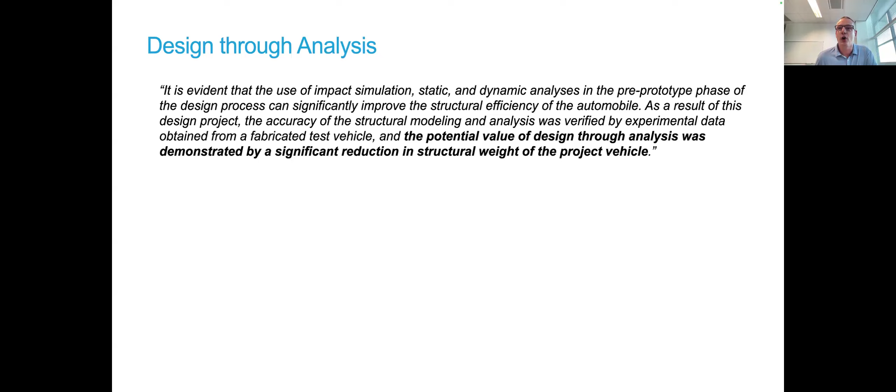To illustrate that, I've put a quote from a paper, just the highlighted part. The potential value of design through analysis was demonstrated by a significant reduction in structure weight of the project vehicle. This is from the automotive industry, and what's surprising is that this paper dates back to 1977. At that time, there weren't big computers that could do simulations in 3D as we do today.

The point they make is that they are not introducing these concepts as new methods. All these methods, in a very rudimentary form, had been around at that time, but they say the manner in which these techniques were integrated and applied in a design environment—that's the primary topic of that 1977 paper.

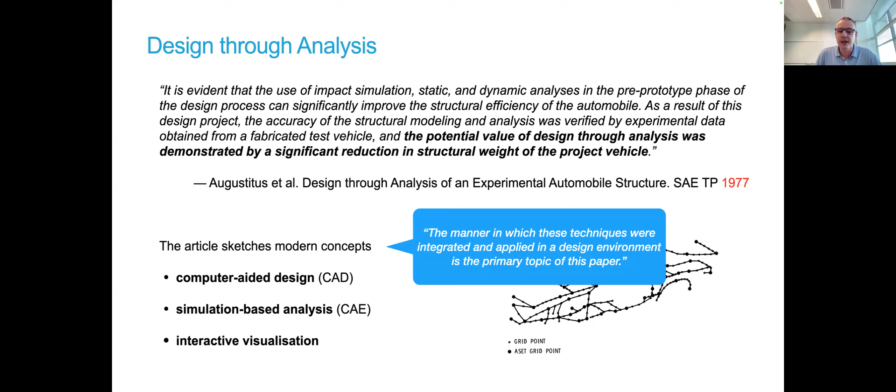Now, many years later, where the compute power is there to do really large simulations in 2D and 3D with very good resolution, I want to pick up this design through analysis concept and explain our vision: a framework that allows both rapid prototyping—for the design exploration or prototyping phase—and more.

And then for the thorough analysis, that means really number crunching to get very accurate results. And the important thing here is the word unified. So I don't want a finite element analysis for the second and something completely different for the prototyping. I want something that seamlessly blends from one to the other, seamlessly in a mathematical sense.

I want something that has the same mathematical background or framework. The ingredients we use, and we'll go through most of them in this talk, are volumetric CAD. I'll say a few words about what I mean by volumetric CAD. Then parametrization techniques, reparametrization techniques, isogeometric analysis, IGA—that's our workhorse for the accurate simulation. And physics-informed machine learning, that's what we use for the rapid prototyping.

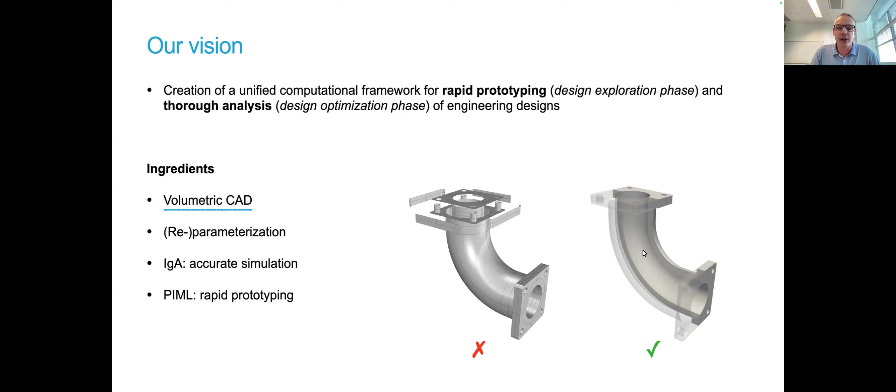Volumetric CAD, what do I mean by that? Normally CAD is just a surface description of your geometry. So you see it here—this tube would be composed of many surface patches, but you don't have anything inside. But for the real analysis, you also need a mesh, if you so want, if you're coming from finite elements, or let's say control points in the interior. So we are really looking at trivariate parametrizations.

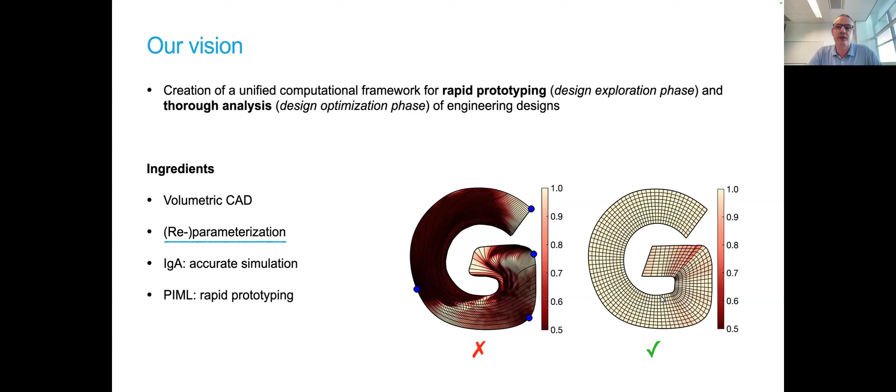And the same, looking again from the outside, the same geometry, but with a much better interior parametrization. That is what I mean by reparametrization techniques, that automatically convert something that you would design in your CAD, giving you automatically these nice, analysis-suitable parametrizations.

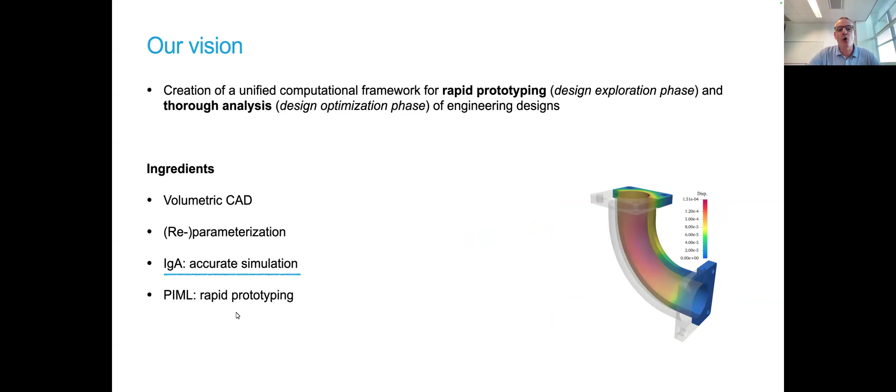On that, we do for the accurate simulation IGA. You can also see it as B-spline-based finite element analysis. These are the things we use from IGA, not more than that. And for the physics-informed machine learning, I hope I can show you how we smoothly blend classical IGA to a deep operator learning framework.

So the outline is logically as follows: a few words about the mathematical core, B-splines and IGA, and then how we develop from classical IGA these IGA nets—this is the physics-informed machine learning approach that I'm going to present here. And if time allows, I will also speak about some implementation details, because it's all about speed, and if you do some tricks here, you can really speed it up. And then finally I want to give you some outlook on a new software tool we are currently developing that allows design through analysis with multiple people at the same time.

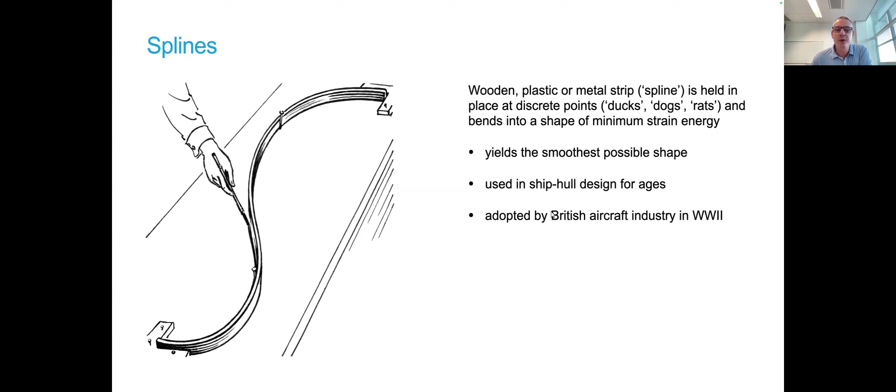So let's start with splines. Before we look into the math of it, I just want to show you that they really exist, or existed, in the real world. You had some strips—wooden or plastic or metal strips—and if you fix them at some places, here, for example, here and there, and then here and here, they attain a shape. They attain the shape of minimum strain energy, and it's a smooth curve that you get. And then if you draw this curve, you can use it—it has been used in ship hull design and then was later adopted in the aircraft industry. This idea, that you have something which you fix at discrete points, a few discrete points, and then you get a very smooth shape, that's also what we do in the mathematical counterpart of this.

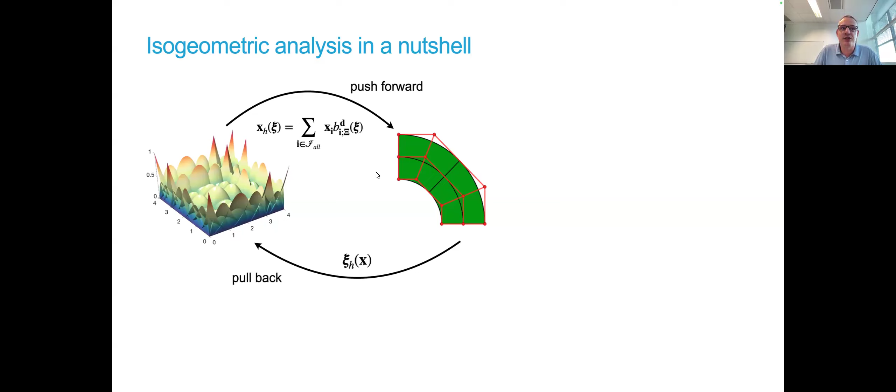But let's skip this detail for the moment. Let's just focus on a single patch, something which is, say, bijective to a unit square, or to a square.

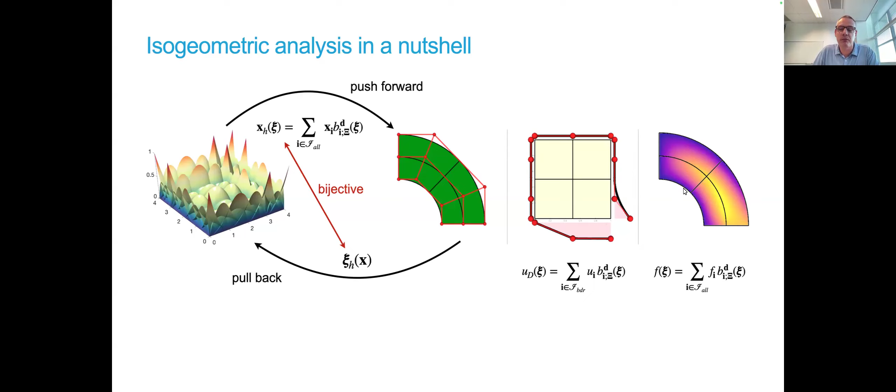It's not only the geometry that is represented in terms of this basis, but everything else. For example, the boundary conditions. Here we have Dirichlet boundary conditions that can be represented in terms of the basis, restricted to the boundary, and the control points or solution values at the boundary. Likewise, we can also represent load vectors or the right-hand side in exactly this way.

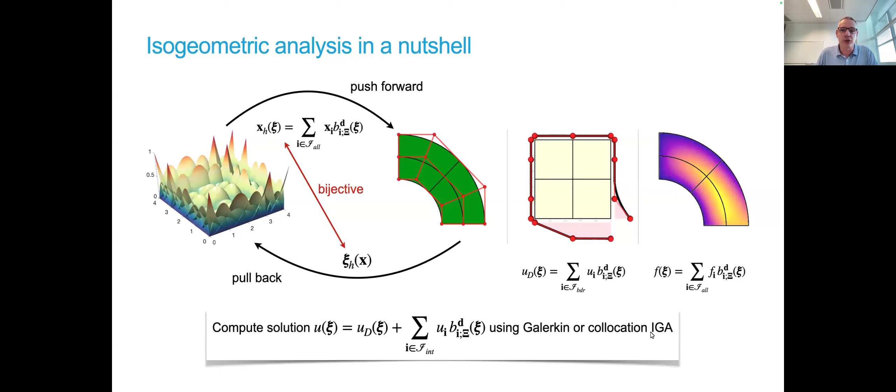With these three ingredients, we can compute the solution with fixed Dirichlet values. What we actually compute are just the solution values in the interior, either with Galerkin isogeometric analysis, which is what most people do in the IGA community, or with collocation IGA, which is what we do here, because that blends very elegantly with machine learning. So allow me to skip Galerkin IGA and immediately move on to collocation IGA.

How is it derived? If we look at the model problem, very simple, just linear: we have a linear differential operator acting on U in the interior, and another differential operator on the boundary. It can be the identity if we have Dirichlet values, or the normal derivative if we have Neumann values. We derive a special weighted residual form, weighting these residuals with some test functions, integrating over the entire domain and the boundary, and requiring that this weighted residual is zero.

So what about these phi's? Well, we compose them from Dirac delta functions centered around some discrete points. A couple of discrete points come from the interior, and another couple come from the boundary. The important thing is that the sum of all these points equals n, and n is the number of basis functions. That means we need as many sampling points as we have basis functions.

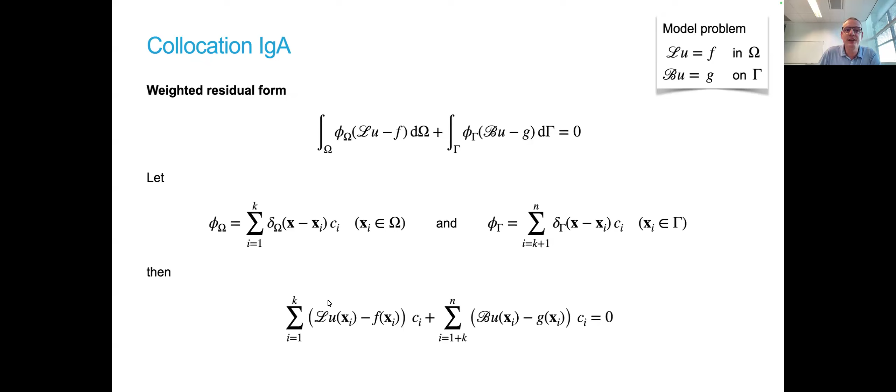With this expansion, or this ansatz, if we substitute phi omega and phi gamma here, we get this requirement, which is really equivalent to that. If we look at what these coefficients Ci are, well, they are arbitrary. So basically we don't need this here, but we can replace it by a linear system of equations.

We drop the CIs, and for each CI that we had, we get an equation. So we get k equations for the interior residual, and n minus k, the remaining number of equations, for the boundary residual.

If we then substitute u by its basis expansion, where b are again the basis functions and u, j are the coefficients we are after, and substitute them here, we get a linear system of equations that, if we solve it, gives us the unknowns u1 up to un. I should say this system is, of course, not dense—it is very sparse, like in finite elements—but just to give you an idea of what is in the system, I kept it dense for the moment.

A few remarks here. First, since we are not doing what we would typically do in Galerkin, i.e. integration by parts—shifting some derivatives from the trial to the test function—we're not doing that here. That means we have a higher requirement on continuity. In particular, if this L is, for example, the Laplacian, so if we have second derivatives, then we also need C2 continuous basis functions. That's where the higher continuity of B-splines is very helpful.

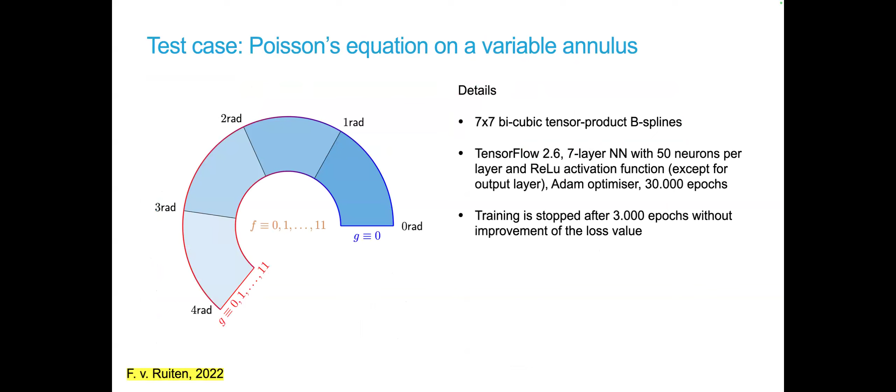Professor Möller, I had a question on that previous slide, if you don't mind. Sure, go ahead.

So when you say you're using geometry as an input with n number of points, what is the dimensionality of that input for the network? Is it the total number of points as a dimension? If you have, say, a 20 by 20 control points grid in 2D, you'd have exactly this for the geometry in X and Y, so times 2, and the same number for this. So you have a couple hundred inputs. Our networks are relatively not deep, but relatively wide.

Perfect, may I go to the next slide then? Sure. So here, what we have is bicubic 2D, 7 by 7 — meaning we have 7 times 7 X values, 7 times 7 Y values. The load vector we encode differently. So if we just encode the geometry, we have 7 times 7 times 2 inputs, which is basically close to 98 or 100 dimensional input.

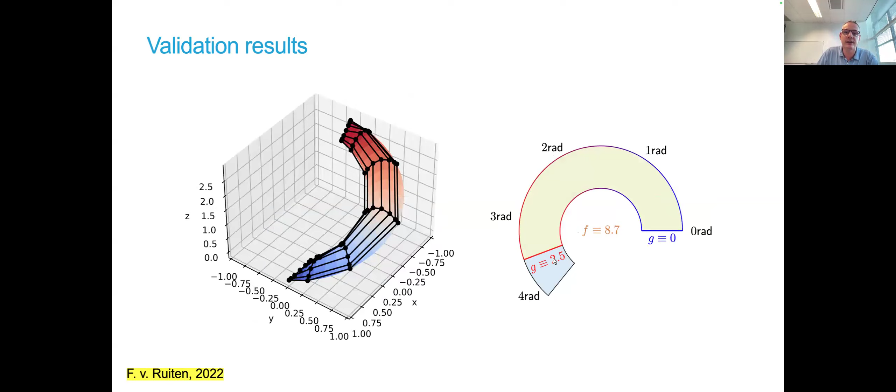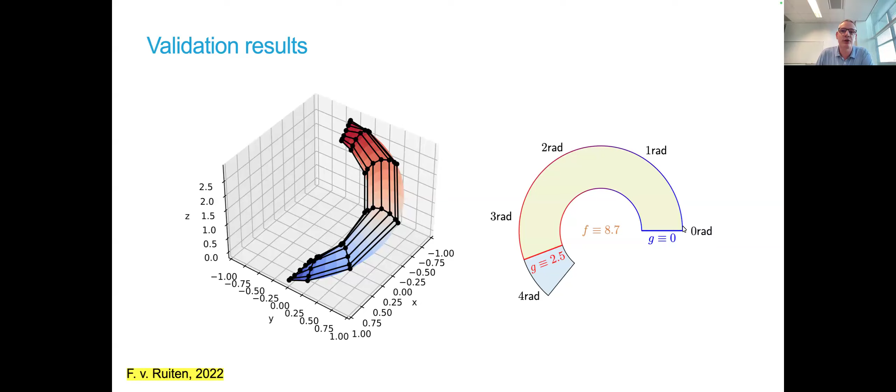We have now an unseen right-hand side, an unseen geometry, and an unseen boundary value, and it all qualitatively works. So in some sense it validates that this approach of IGA-nets does work. This is all for Poisson, I should say. What we then tried is hyperparameter tuning, which addresses a bit what you asked.

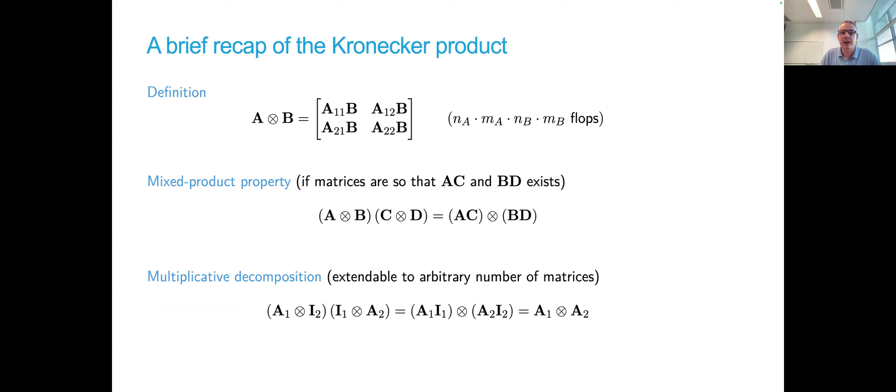So actually, this here is what we would like to compute. Let me go back - these are the things that we would like to compute, and we can replace this by several matrix products. So these are the three, or the Kronecker product between three matrices that we want to compute. We can split it up with this decomposition from the previous slides like this.

And when we have that, we can apply a very nice algorithm that has been introduced by Fackler in 2019, where it kind of goes in rounds. It peels off one dimension and then goes over this round, and then over this round, and then over this round. So I'll just give you the pseudocode here.

What it does is take the relevant coefficients from this big tensor, do a reshape on that - but this reshape involves no movement in memory, it's just looking at the same piece of memory with different meta information - and then peel off the first dimension multiplied by the first univariate B-spline, then the second and the third. So this is a very efficient and especially memory efficient way to calculate the multivariate B-splines.

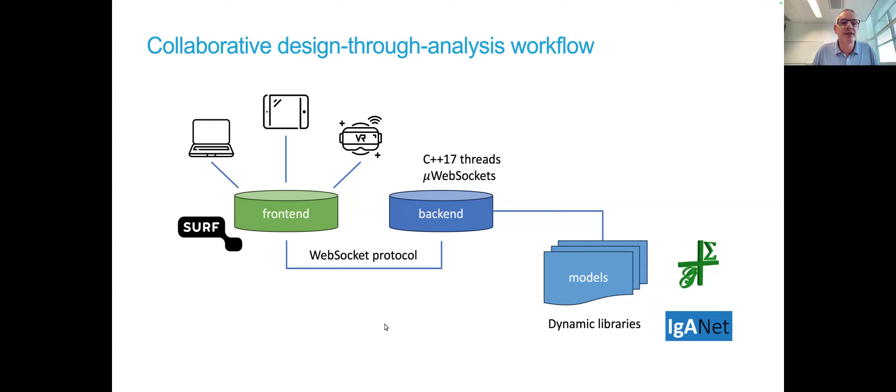Let me show you one little live demo, then you get an idea of what I mean by this. Let me stop sharing for a second, move to this, and share again. Yeah, so this is the... you see this screen? Ness? Yes, we see. Yes, okay, so this is the system. It's a prototype, I should say, that we are working on.

Let's assume we do a simple 2D Poisson problem. We are adding it here - it's already configured with zero Dirichlet conditions, a load of 1 here. Let me refine it because there are too few degrees of freedom, and maybe I want to change the north side of the domain - I want to change the boundary conditions, let's say, to this, for example.

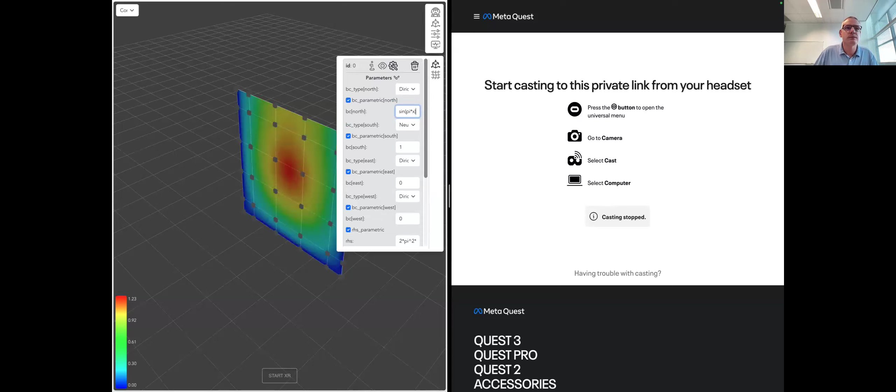So that has changed. What I now try to do is connect with the second session to this, and then you see what I mean.

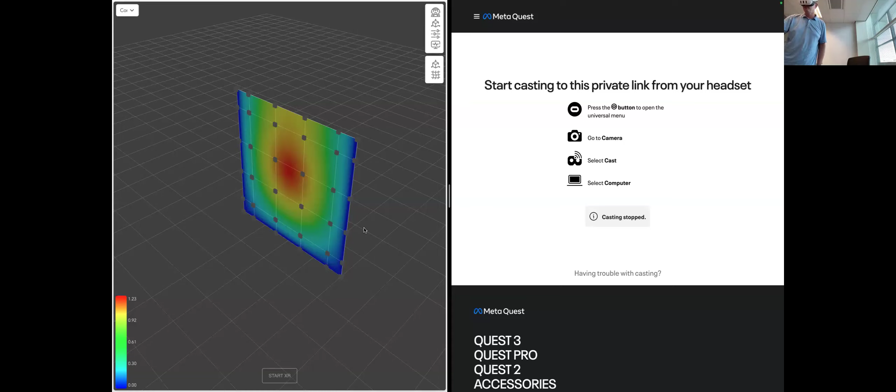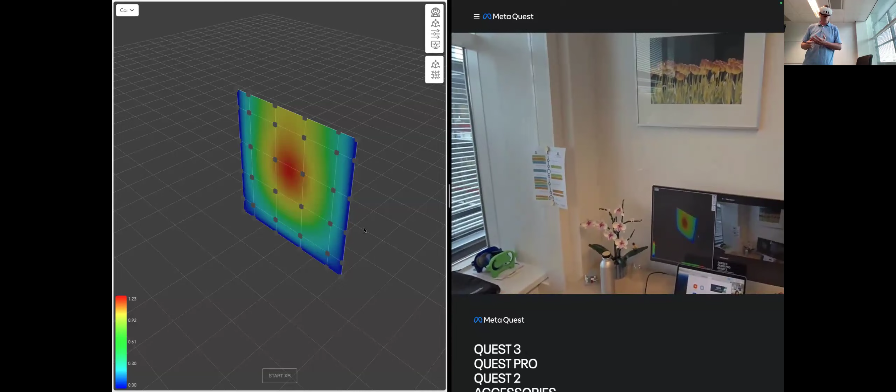Do you also see this moving picture? Yes. The second session is, as said in the abstract, a VR device. All these things like setting up the boundary conditions, that's of course something one can easily do on a flat screen. But maybe if someone is more interested in the geometric modeling, then this person wants to connect via a VR device.

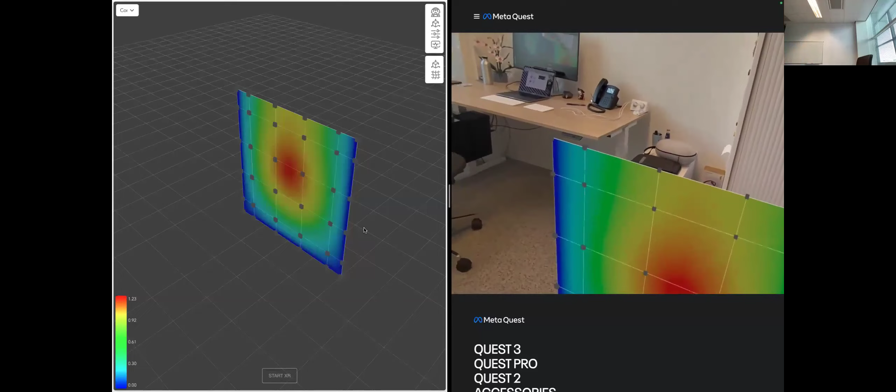Okay, sorry for the technical issue. So now you see, hopefully, what I see from the VR device on the right part of the screen, and what the other person with the flat screen would see.

Now what I can do is I can change the geometry. You see it's changing everywhere. That's maybe something that makes more sense in the VR device than on a flat screen.

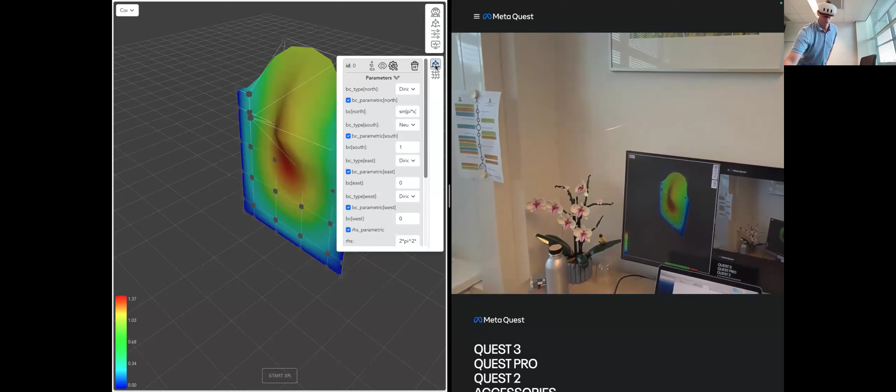And also, if you would now add a... yeah, that was just a flat thing. If you would add a volumetric thing, just a volumetric object, let's also refine it.

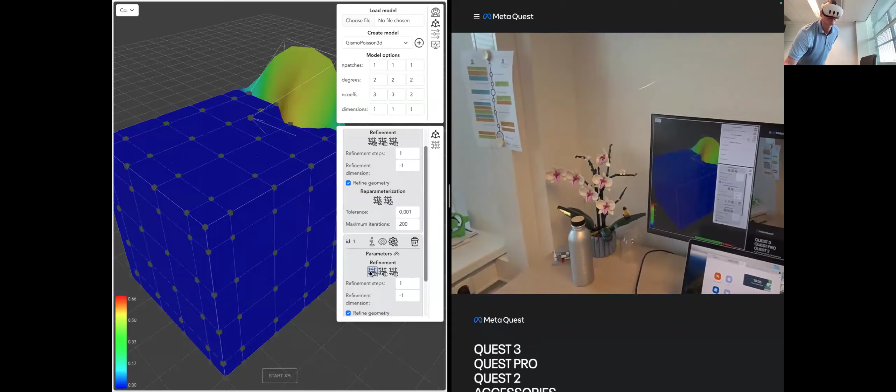So you see it also appeared in my virtual environment, or in my virtual scene. And now if you start moving this and wonder how it looks inside, then you look inside and here you see this grid. So all these points, this, for example, is one of these control points in the interior that I spoke about.

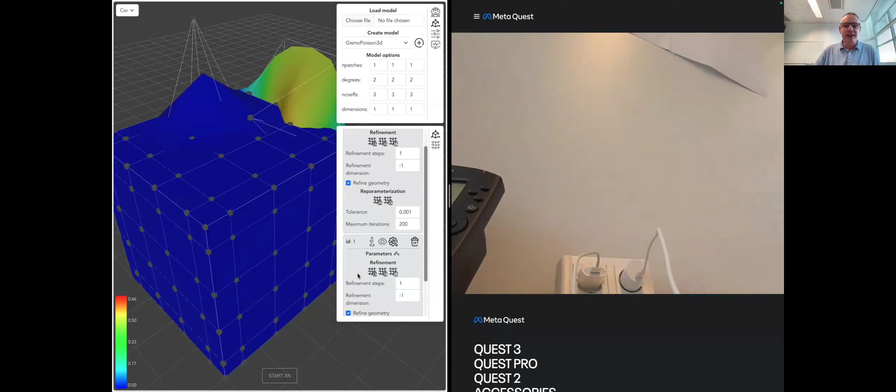So I think I'm getting over time. So let me stop sharing and come to the conclusion.

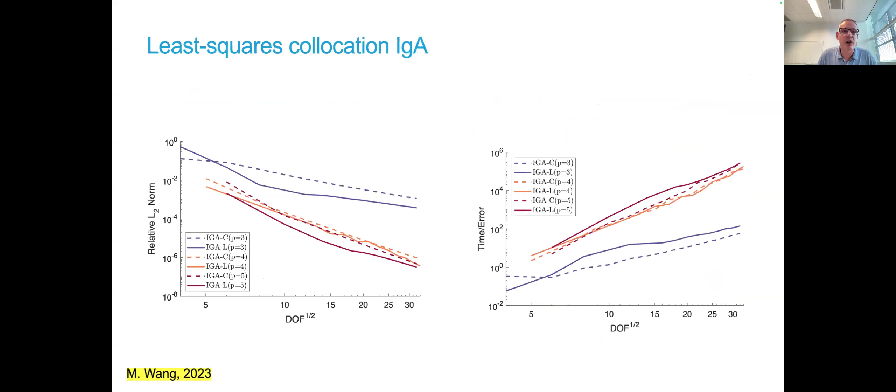Can I reuse this model, or do you have to train it from scratch? No, it's really good that you asked that. Let's say this network, when I say 'all,' please see it in quotes, for all the geometries that I showed to it during training, and similar ones, it can be used. So what we do, for example, we showed it 4 different geometries, and within these geometries it can kind of work.

If we show it a geometry that has the boundary here, that does work. That's very much like in PINNs. It is good at interpolating, not so much at extrapolating. So if we only showed it these 4 geometries, don't expect that it can work for a completely different one, like a snake geometry. That of course doesn't work.

So the idea is we train it for the typical set of geometries that are of interest for this particular application, and that very much depends. It could be, for example, wings. If we talk about aircraft wings, they have a very similar shape. And if we train it for a lot of different geometries of this wing type shape, it should be good at predicting also for an unseen wing type.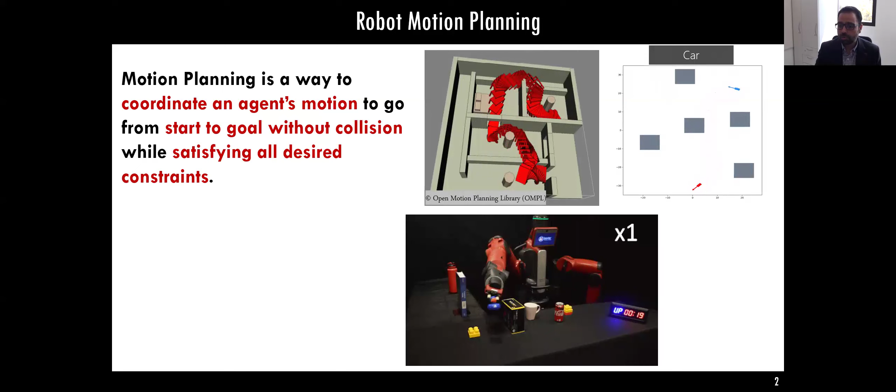Similarly, in autonomous driving, making cars move while respecting curvature constraints requires solving the motion planning problem. This also applies in robot manipulation, and beyond robotics, in computational biology for finding protein folding paths, and in computer graphics for generating the motion of animated characters.

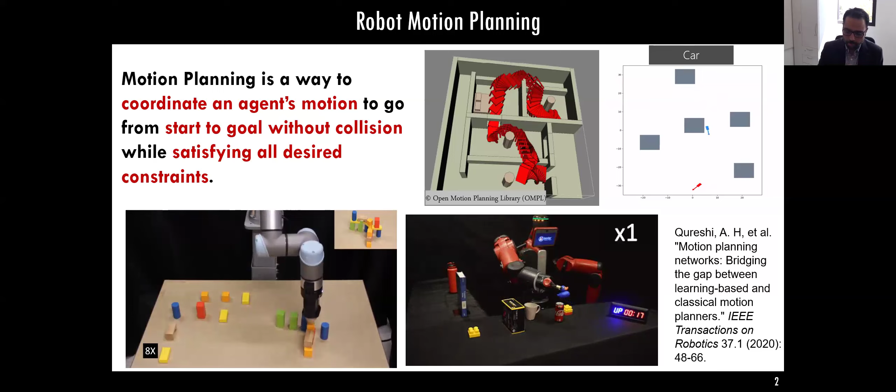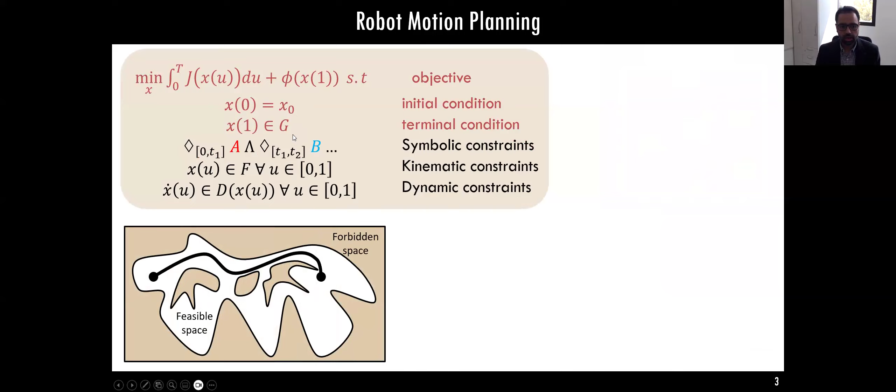Mathematically, this problem looks like this. The motion planning problem translates into a trajectory finding problem, where you are given some start and goal, so there are boundary conditions on the initial state and the goal state. This trajectory needs to satisfy some objective function J, which could be path length, and which could include a collision avoidance constraint. We also add some weighting so that it terminates once the trajectory reaches the goal state. This equation, highlighted in red, is called the geometric motion planning problem.

It appears whenever a robot moves and only has to adhere to, for example, a collision avoidance constraint. As you can see in this robot, it is coming out of this tight scenario confined by tables, and it needs to come over the top, grab this blue object, and move it to the yellow target marked as a Lego block.

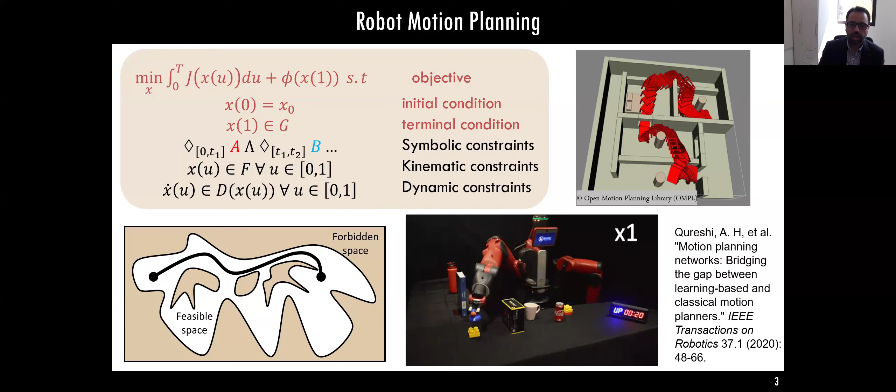Now, on this trajectory, we can add additional constraints. For example, we can add symbolic constraints saying that before you reach your final destination, achieve some sub-goals, like sub-goal A and sub-goal B, before reaching your destination.

How does this translate to the real world? For example, you have this confined environment and your robot needs to retrieve some object. In this case, the robot needs to retrieve this yellow object, which is a banana, and then it needs to move—but as you can see, it cannot reach there. It needs to move this red object and the blue object out of the way so that it can clear its path to reach the target without collision.

An application of these tasks is, for example, a home robot that you want to fetch something from your kitchen cabinet or refrigerator. It will have to rearrange objects and solve these kinds of problems to retrieve and fetch objects for you.

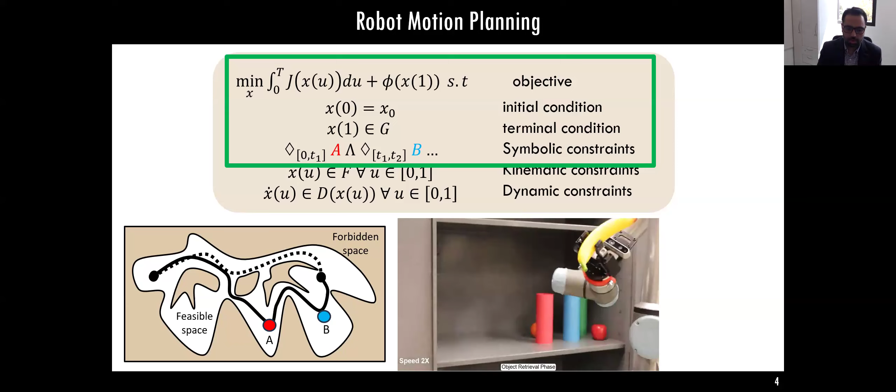On top of these constraints, we can also add kinematic constraints. They are a function of robot joint configuration, and basically they limit the joint space. They usually appear when your robot is physically interacting with the environment. For example, imagine a robot opening a door—the robot hand is attached to the door, and the door hinge is controlling the robot's motion.

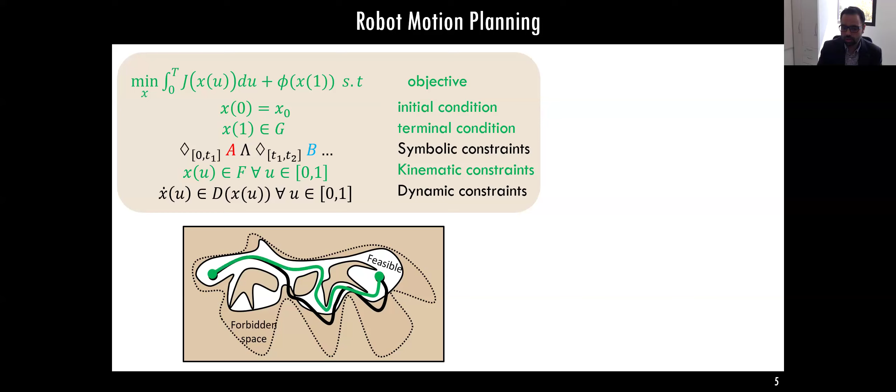These constraints induce a thin manifold inside the robot's configuration space where the algorithm needs to find a solution. For example, in the application I mentioned, the robot is attached to the door and needs to respect its physics in order to generate the door-opening motion. In another example, this robot will pick up a glass and move it from one point to another, with the constraint that it cannot tilt it along certain axes to prevent liquid inside it from spilling.

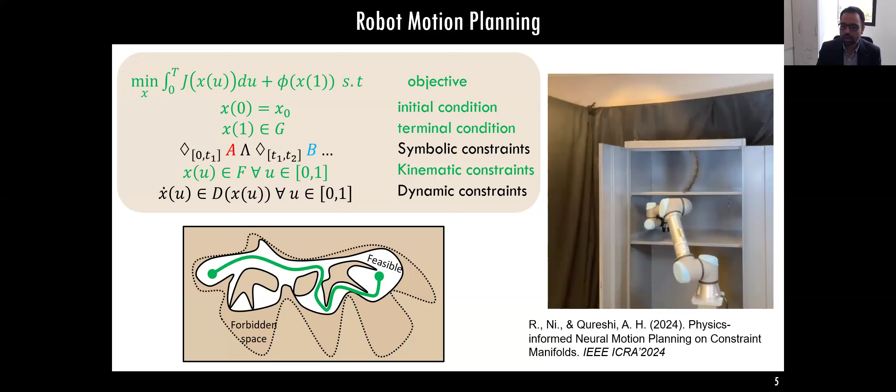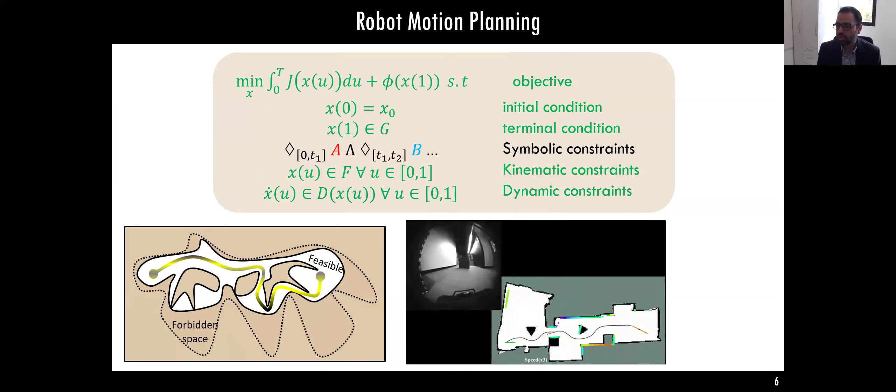And then there are additional dynamical constraints. They are a function of time, and they basically control the robot speed and the impact force that it applies in the environment that it is interacting with. For example, in autonomous driving, it could be high speed navigation or low speed navigation, depending on the scenario. So the robot needs to plan how fast it can interact with the environment, and that indirectly controls the force it applies on the environment.

So today's talk will focus first on geometric planning, and then we will also discuss a little bit about kinematic constraints. That will be the focus of today's presentation.

When we add these constraints, they introduce some forbidden space inside the robot configuration space and some feasible space. The objective of these algorithms is to find the solution in this feasible space.

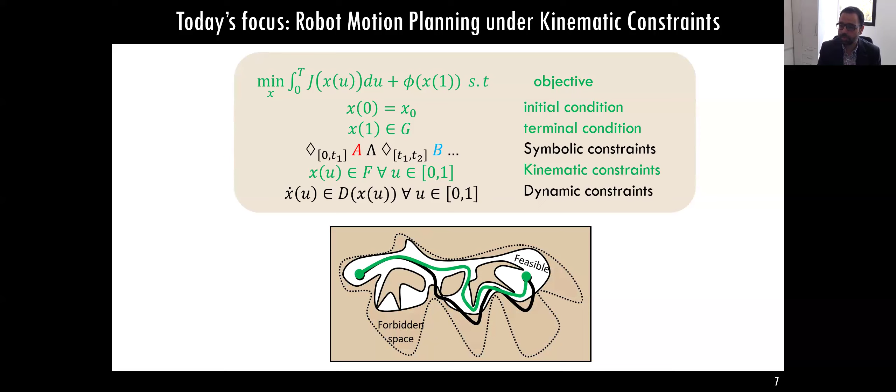Okay, so let's get started. This problem of geometric motion planning was introduced in 1983 by three sets of papers where they asked a simple problem of how to move a piano from one point to another without collision. That was a very simple problem. It is solved now, but since then many algorithms have been proposed to solve this problem. As I said, it has application beyond this piano mover problem, in controlling robot motion, in computational biology, as well as in computer graphics.

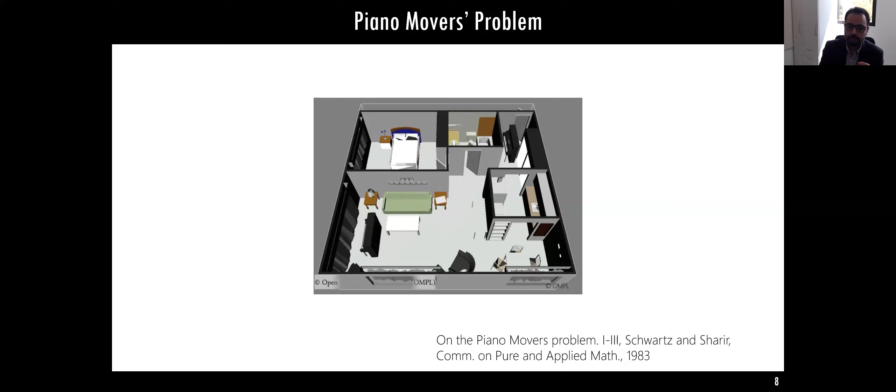So since then, many algorithms have been proposed, and this is a brief taxonomy of those approaches. There are control-based approaches that build on control theoretic methods, such as model predictive controllers, but they plan robot motion locally. They usually do not find a global solution.

Then there are heuristic-based methods that discretize the space, for example A star and D star. However, they suffer from the curse of dimensionality due to discretization. As your robot configuration space increases, the discretization becomes intractable to handle.

Then there are optimization-based approaches that introduce nice numerical optimization algorithms to solve the motion planning problem. They suffer from local minima, and often they are unable to provide a global solution to the trajectories.

Arguably, the most used algorithms are sampling-based planners. I will discuss them briefly. They find global solutions and provide some theoretical completeness guarantees, meaning that if there exists a path solution, this algorithm will eventually find that path solution. So let's discuss briefly the sampling-based planner.

They construct a graph. They randomly sample the feasible space, which is collision-free space, and they find the nearest neighbor and connect this node to the tree. They keep repeating this process until eventually a sample will fall in the goal and it will be connectable to the tree. Then one branch of the tree is the path solution.

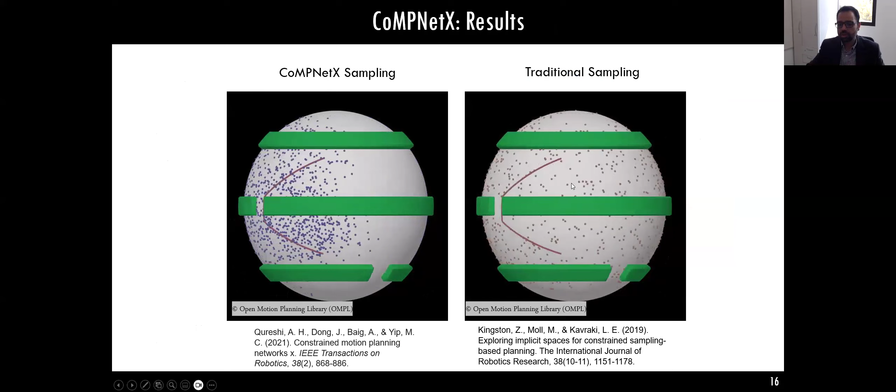And if you replace the data of this planner with, let's say, some constrained planner that adheres to kinematic constraints, then it can also solve constrained problems such as generating samples on the constraint manifold. Here you can see on this sphere manifold, once you train the neural network, which we call CoMPNetX, it samples in the region that potentially contains the path solution, whereas traditional sampling has to sample the entire space before it can retrieve a path solution.

So here's a demonstration: this robot needs to throw all these bottles and cans into the trash bin. Here we just have the collision avoidance constraint. Then it needs to reach this cabinet door and open it, from any random starting configuration to the final fully open goal configuration.

Then it needs to fetch this black and red mug and move it to the tray without tilting, so there is an orientation kinematic constraint on it. Finally, this robot needs to move this pitcher into the cabinet again without tilting.

So the advantage of this imitation learning based method - if you look at their planning times - is that CoMPNetX-RRTConnect has much lower planning times than classical methods, because classical methods have to sample the entire space.

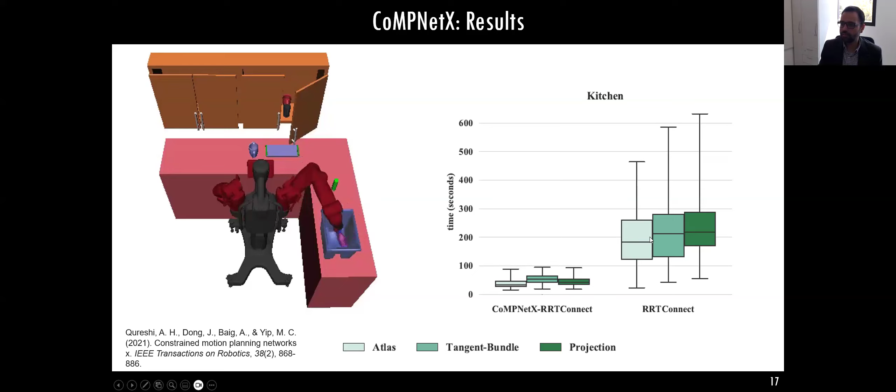And we also demonstrated this on a real toy bartender setting, where the robot will throw these cans and empty bottles into the trash bin. Once that's done, it will move this pitcher and cup to the tray without tilting.

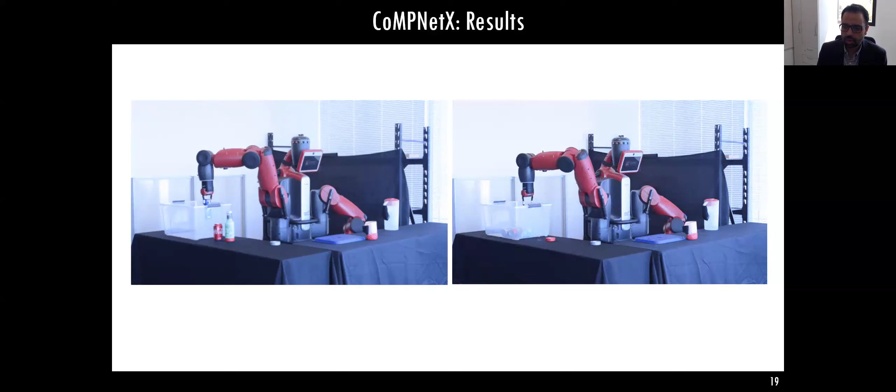Okay, so now we have sampling-based planners, which can take minutes, and we have learning-based planners, which use data from those classical planners and can find a path in seconds. So although they improve computation time, if you think about their data generation time, it can take a few hours or up to days depending on the problem.

So are they really bringing an advantage? Some people say we're all dealing with large scale data now, so why not just gather data for this learning-based planner? But I think the ideal planner would be something that finds paths in minutes, finds paths even faster than seconds, and has a data generation time of just a few minutes. So can we have those planners?

The answer is yes. If you design these methods to be physics-informed, they can relieve you from gathering this expensive dataset, and they can directly learn to solve that PDE equation. Once they are trained, we show that they find paths even faster than those learning-based planners. So the remainder of this talk will focus on these PDE-based robot motion planning algorithms.

So we introduce a new taxonomy here called physics-informed neural motion planner, and I will discuss the algorithms that we proposed. I can take a few questions here if there is any.

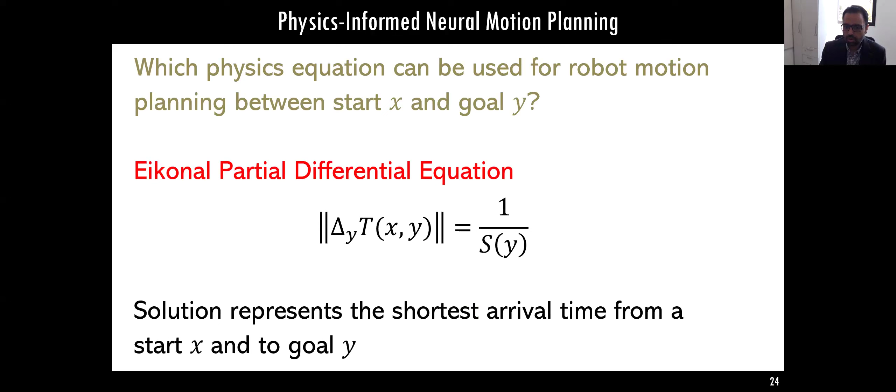Let's go into this physics-informed neural motion planner. The question is, which physics equation can be used for robot motion planning between a given start and goal? The answer is we use the eikonal PDE, which relates arrival time between a given start and goal to some speed model.

The classical algorithm that solves this equation is the fast marching method. It discretizes the space and does numerical optimization to find the solution to this eikonal PDE. The solution is this arrival time field. If the robot follows this arrival time field, it can navigate from one point to another.

The speed field basically describes what is feasible space and non-feasible space. The speed in free space will be maximum, however speed in obstacle spaces will be 0. When you solve this equation, the arrival time generates these wave fronts that can guide the robot from one point to another.

However, this fast marching method cannot be scaled to higher dimensions. Usually robots are 6 dimensional if you think of a robot arm, but for a humanoid robot, dimensions vary from 18 to 72 degrees of freedom. So these FMM-based methods cannot be scaled there.

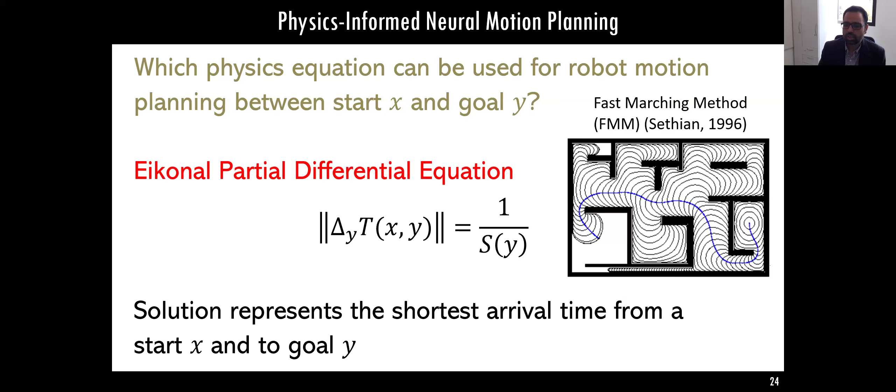So we need something that does not require discretization and that can be scaled to higher dimensions. We observed a few properties of this eikonal equation.

One, when we solve the motion planning problem, we noticed it should have this symmetric property. This implies that the arrival time from start to goal, and arrival time from goal to start under a simple collision avoidance constraint, should be equal. So there is this symmetric property.

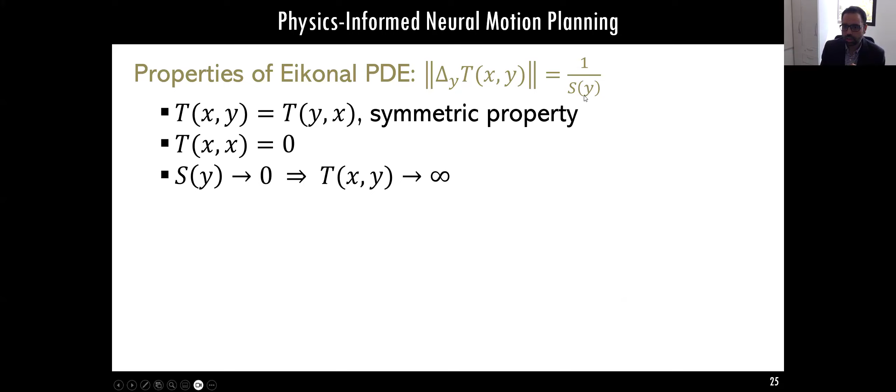Second, when the start and goal are the same point, the arrival time should be 0. Third, when one of the points is an obstacle, let's say y is an obstacle, then the speed will be 0, and the arrival time should be infinite, because of this relation: if the speed term is 0, then arrival time will be a very large number.

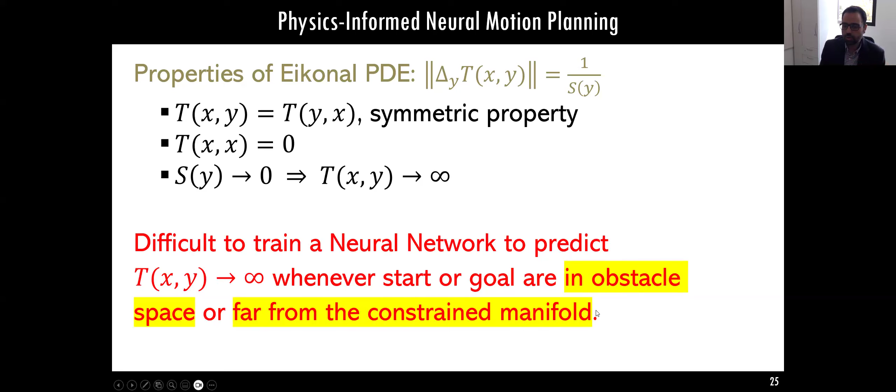If you notice these properties, they are very difficult for a neural network to learn. A neural network cannot correctly solve for cases where arrival time is close to infinity, or whenever the start and goal is an obstacle or far from the desired constraint manifold.

So we introduced a reformulation of this eikonal PDE that satisfies these properties, and we also introduced a progressive learning strategy to help guide the neural network to solve this problem. Let's begin with the reformulation of this eikonal PDE.

We factorized the eikonal equation. We define the arrival time as the ratio of the Euclidean distance between x and y divided by some tau, and the neural network will predict this tau. We can say that whenever start and goal are the same, tau can be 1, and this arrival time will be 0, because the distance will be 0.

But when one of these is an obstacle, we can make this tau be predicted as 0, and then this relation will hold the third property.

For the symmetric property, we adapted a neural architecture that you can check in our paper, 'NTFields: Neural Time Fields for Physics-Informed Robot Motion Planning.' Let's assume this neural network is a black box, a simple neural network, but there is some articulated structure, a symmetric operator in the architecture design that you can check in the paper. For simplicity, let's assume this is just some neural network.

It takes your start and goal, and predicts tau. Then we can use this tau to parameterize this factorized eikonal equation to get the arrival time. Once we have the arrival time, we can plug it into the eikonal equation and solve it.

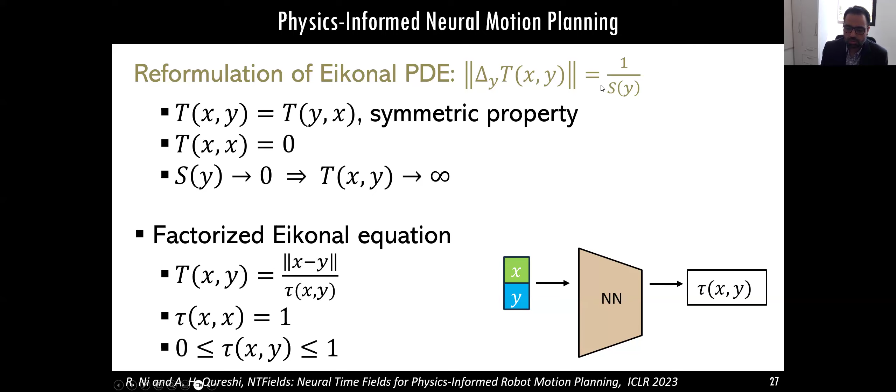So now this new formulation is easier to train because tau is between 0 and 1, which is easier for the neural network to predict.

Second, we noticed that this eikonal PDE also lacks a unique solution around obstacles. Whenever there's an obstacle, the features of this wavefront become very sharp, and there are multiple solutions. If you see this animation, there are sharp features near the obstacle, which leads to multiple solutions. We noticed that the neural network cannot correctly solve this equation because the equation is ill-posed.

So we added another term: a viscosity term based on the Laplacian, which made this equation a semi-linear elliptic PDE. Now we have this original term, the norm of the gradient of arrival time, plus epsilon times the Laplacian, equal to 1 over speed. Now this equation has a smooth and unique solution.

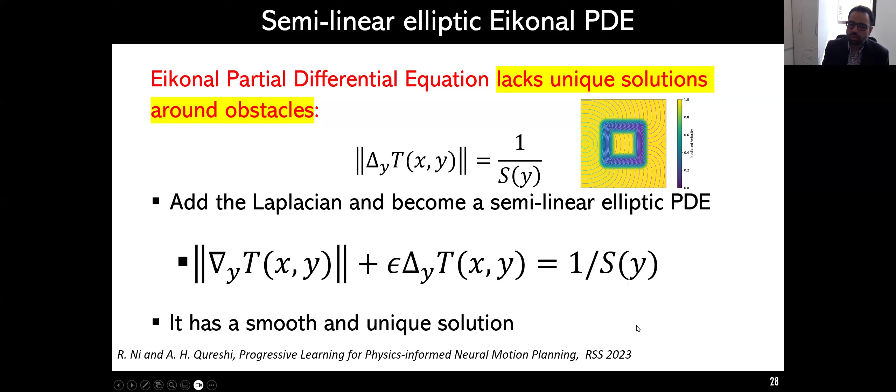And when I add this factorized eikonal equation formulation into my equation here in brown and do the differentiation, it gives me this relation, which relates this predicted speed to this predicted tau. So my neural network will take start and goal, it will predict tau, and I will use tau and its gradient to parameterize this equation, and then from this equation I can get the speed field.

So just to repeat again, we had this semi-linear elliptic eikonal PDE. We plugged in this new factorization for arrival time into this equation, did differentiation, and then we got this complicated equation that you see here.

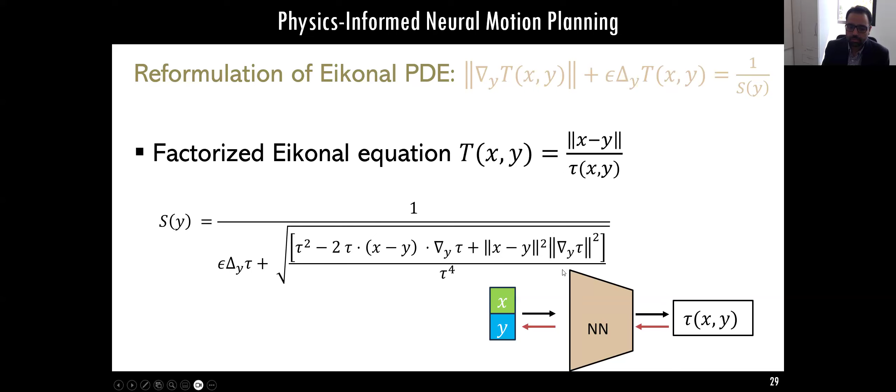So now I have a neural network that takes the start and goal, predicts tau, and then I can use the gradient to predict the speed.

To train this neural network, I compare this predicted speed to some expert speed model that a human defines. The speed for the model simply says at any given point, it clips based on the distance to obstacle. So you can think of it like the speed will be some constant value in free space, then this d will be minimum in obstacle space.

So this is the data we need to train this network: some sampled points of robot configuration and their distance to obstacles. And then we can use that distance to define this expert speed model, which is compared against this predicted speed model to train this neural network.

So the only data is robot configuration samples and their distance to obstacles. Unlike imitation learning based methods, if you recall, they needed trajectories from a classical planner, which were very computationally expensive to obtain, but these samples are much faster to obtain. You just need to randomly sample robot configuration space and call the collision checker to compute their distance to obstacle.

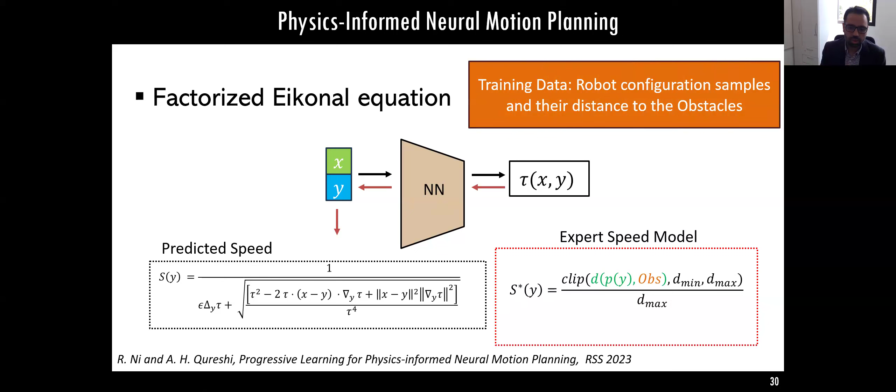Now we discussed the reformulation based on these last two properties, and we also added a viscosity term to make it semi-linear elliptic. Now let's discuss this progressive training strategy.

So during training, we noticed that if we start from this last alpha equal to 1, when speed is 0 around or inside the obstacle and some constant value in free space, it's very hard for the neural network to converge to this space. So what if we gradually lower down the speed around obstacles and train the neural network on, let's say, an alpha equal to 1/3 setting, where the configuration can penetrate a little bit into obstacle space, then we keep hardening this constraint over time during training. We noticed that it really helped converge the neural network to a better local minimum.

So our expert speed model that we defined based on distance from the obstacle now has this alpha parameter, which basically scales it up or down. So if this alpha is high, then we are saying that it should have a very low speed in obstacle space. As this animation shows, we gradually reduce the speed during training.

So maybe for the first 100 epochs, it will have some alpha equal to 1/3. Then as the training epoch progresses, this alpha will be increased.

So now we have all the ingredients, and we have this neural network that takes start and goal, predicts tau, and then I can use its gradient to predict my speed field around the goal configuration, as well as take the gradient of this with respect to x and compute the speed field around my start configuration using this equation.

And now I have these two predicted speeds. I define my ground truth speed, and you see little alpha here, so they are based on the progressive learning strategy that I mentioned a moment ago. And then we train this network through some loss function between this predicted speed and ground truth speed.

Let me grab my cell phone to keep track of time. Okay.

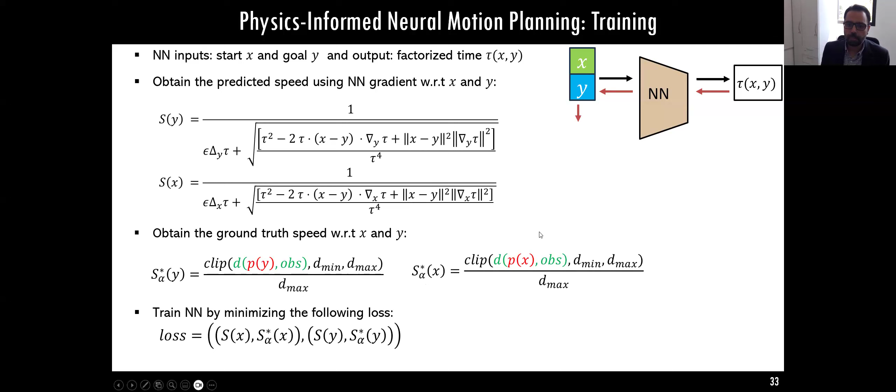Now, once this neural network is trained, I can use it to infer the path solution. So given any start and goal, this neural network will predict the tau, and then I will use this tau to parameterize this new factorization that we introduced to predict the actual arrival time field.

Then we will also use the gradients to predict this speed around the start state and the goal state, and then we can take gradient steps toward the arrival time field direction to update my start and goal, so they will iteratively move toward each other, leading to a path solution.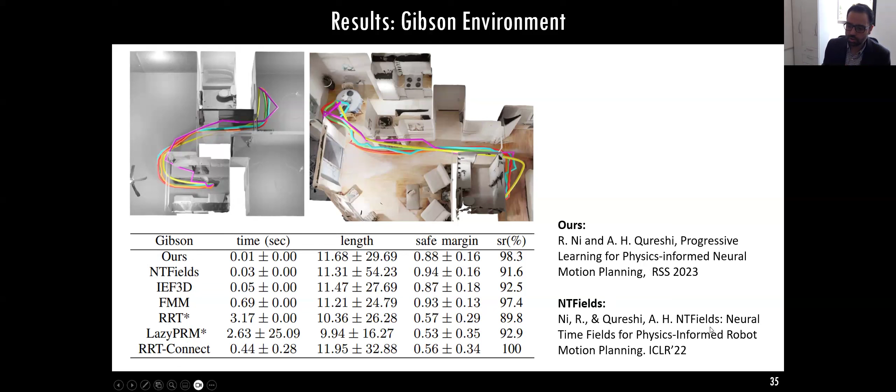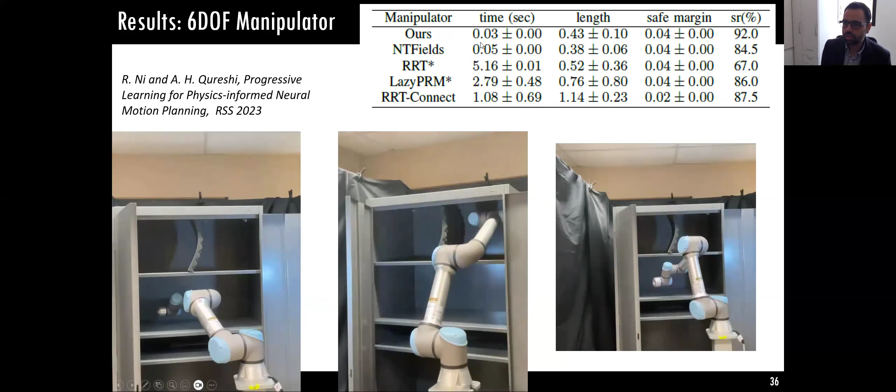But other methods like sampling-based ones are scalable. However, their success rates are much lower because of the time limit we give them. But our methods, you can see, just take sub-seconds to find the path solution.

Now, if I replace my expert speed model—so before we had this obstacle here and we were computing the distance from obstacles—if I replace this data with some distance to the kinematic manifold, then I can even train these neural networks to solve the kinematic constraint problem.

So all you need now is samples and their distance to some constraint manifold. A constraint manifold is, let's say you have a robot and it is opening a door, so that door motion defines some constraint manifold. If you have a robot carrying a glass filled with fluid, it cannot tilt it freely, so that introduces some other constraint manifold.

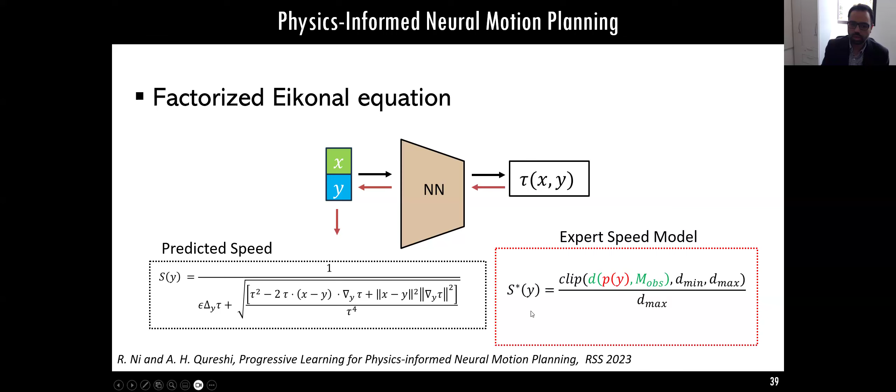These samples go as a pair into this neural network to predict this tau. Then we use this tau to parameterize the predicted speed equation, and define the loss function between this predicted speed and the ground truth speed. We train the model, and it can solve the kinematic constraint manifold problem.

So here you will see it is opening the door. That is one constraint. And then it is moving this cup filled with soda from one point to another without tilting.

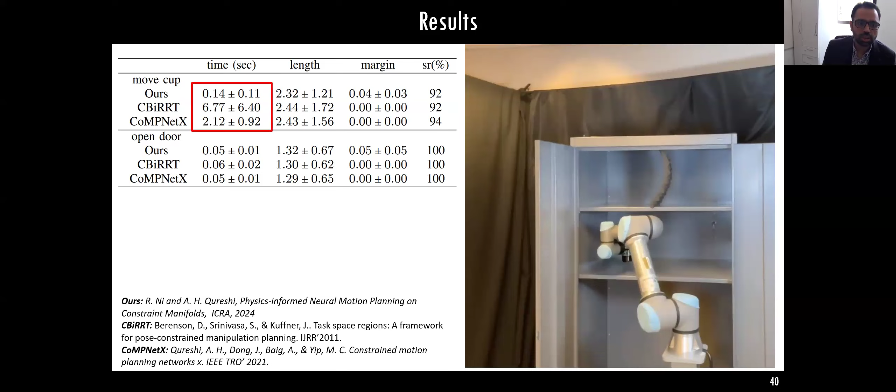Now if you see the planning times, again, this physics-informed method is much faster than CBiRRT, which is a sampling-based planner, or CoMPNetX, which is an imitation learning-based method. CoMPNetX had to get data from CBiRRT for training, but during execution, their planning time is relatively faster than CBiRRT.

But you can see a significant margin between ours and this imitation and sampling-based method. Success rates are somewhat similar. But if you see the data generation time, this imitation learning based method took like 12 hours to gather the data, whereas our method in this constraint problem took 10 minutes.

And the training time of all these models were somewhat similar. This paper, which uses this physics informed method, is published here. You can check it online, and these are the references for other papers.

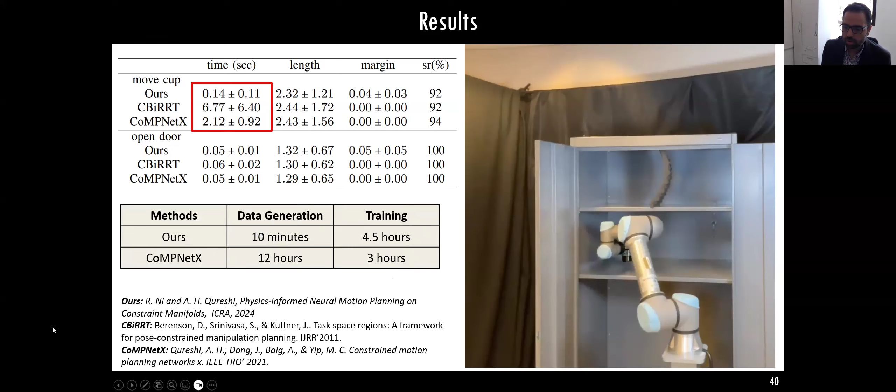Now, getting to the conclusion. If you see the progress in the field of robot motion planning, we are aiming for methods that are computationally efficient, that we can deploy on the robot, and the robot should be able to find solutions almost in real time.

This problem, as I said, was identified in 1983, and since then many algorithms have been proposed. Sampling-based, search-based methods find paths in minutes, but if your problem becomes too complicated, they often suffer from the curse of dimensionality. And then there are imitation learning-based methods.

They are trained on data gathered by sampling-based or search-based methods, but during execution, they find paths much faster. However, anywhere the sampling-based planner will fail, gathering data becomes really complicated, and we won't be able to get these imitation learning-based methods. So even though they take hours to days, there can easily be problems where this becomes intractable and very hard to gather the data.

Then we have now physics-informed methods, whose data generation takes few minutes, and planning time takes sub-seconds. Our future goal is how we can further reduce this time from few minutes to even close to a zero-second time scale, and how we can go further from the sub-second, and also add some kinematic or dynamical constraints that I mentioned.